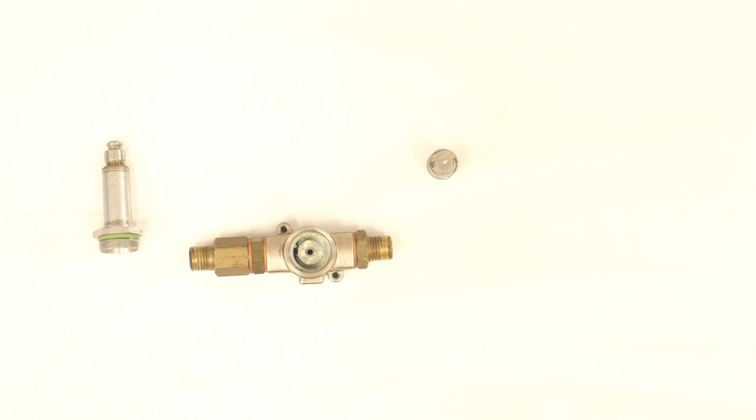Anyway, back to solenoids. All right, before I explain how solenoids work, let me show you the internals of it. So I ended up ripping this one apart already. And for any of you out there who are watching this struggling to get theirs open, let me show you how I ended up separating it. Because what ends up happening, you have your solenoid nucleus recessed in there, and then this guy is screwed on.

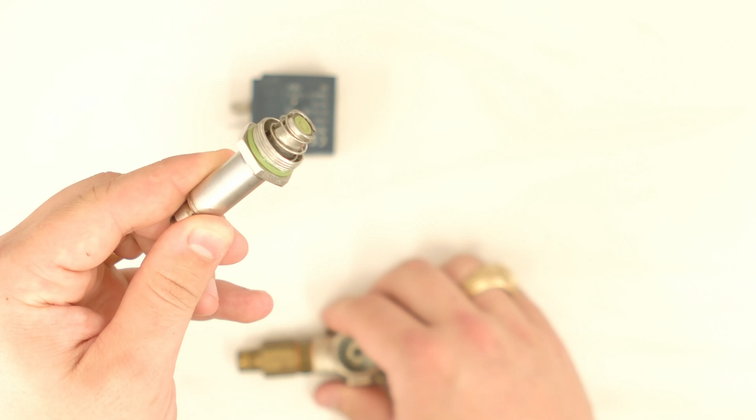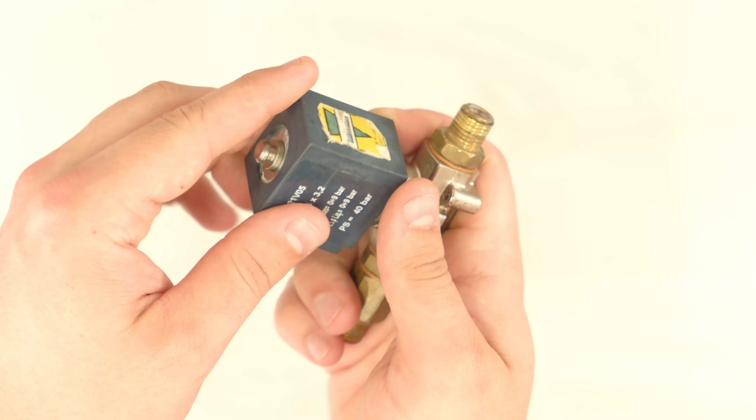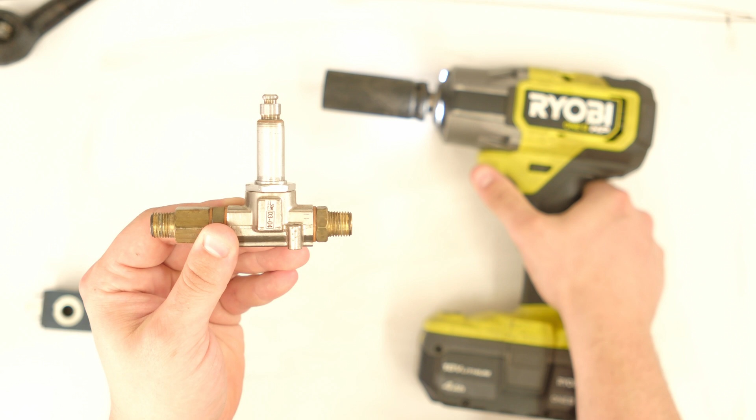This is our electromagnet or solenoid coil, and that seats on top, and then you have some weights on. Getting this guy off, usually pretty easy. You're going to try to get this stupid thing off, and you're going to struggle, and you're going to worry about stripping it. I'm not going to tell you exactly how I do it, but often it involves a vise and this guy. Just being real, you can yell at me in the comment section for that, but guess what? That's pretty efficient if you ask me, especially whenever there's any kind of calcium buildup. Yeah, you can get mad. I don't care. Whatever. Deal with it.

So before I doodle, I just want to show the on-off state. What we're trying to do is make a seal, and you can see that this is an older one that's a little bit dirty. You're trying to make a seal with this nucleus against that little guy there, the little hole right there in the center. You can see where they've been mating up over the years.

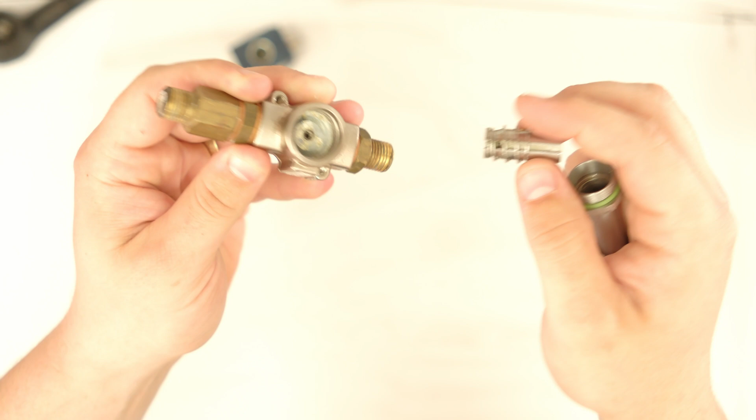And if I can properly press that into the hole, then there's no water flow. And if I lift it out, now there's water flow through it, and we're trying to get water through the channel, into the hole, and out the other side. It's a pretty simple concept. So let me doodle this for you just so you can see it.

We're going to have an off state, which is your normal. So you have no power going to this coil right now. And I'm going to show you how to test these coils in a second. You have an on state. And then to draw the inside here, let's do this. You end up having some kind of little seal in that kind of shape, and then an outlet. This is all your water inlet, and this is your water outlet.

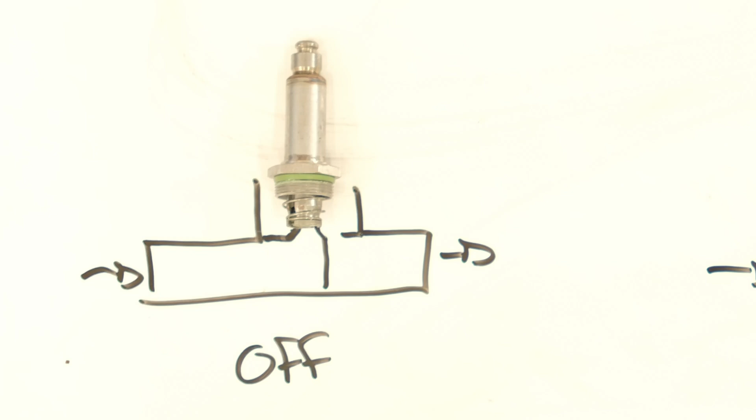For the off state, this spring is now pushing all the way down on that outlet. And hopefully you can see that there. And for the on state, what's happening is we're actually taking this and we're using a magnet to pull that up, and now water can go through the system.

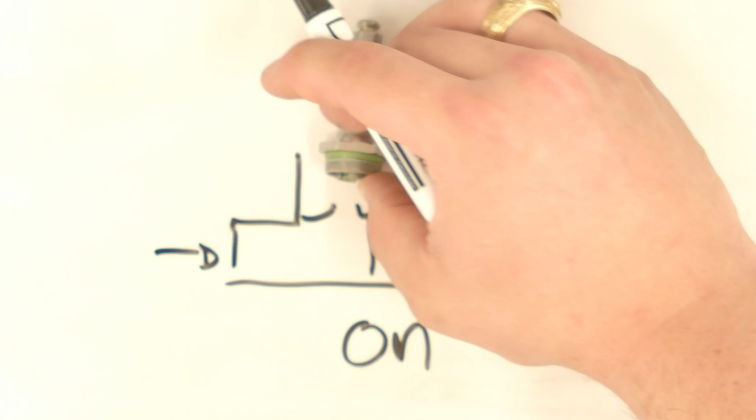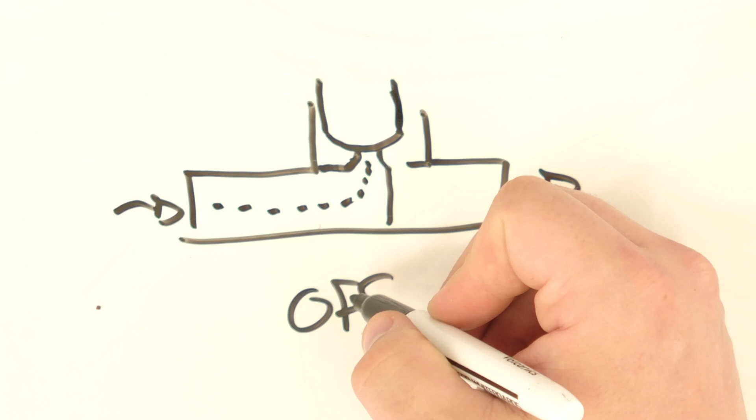So off state, that solenoid coil, the nucleus there, is all the way pressed down. Water's trying to come in, and it ends up hitting, and it can't move anymore. Sometimes you can have it go in the reverse direction. It just depends. For the on state, that magnet has now pulled that solenoid nucleus upwards, so it's now moved up rather than being face down, and you can have water run through, up, over, and through the channel. That's the simple way.

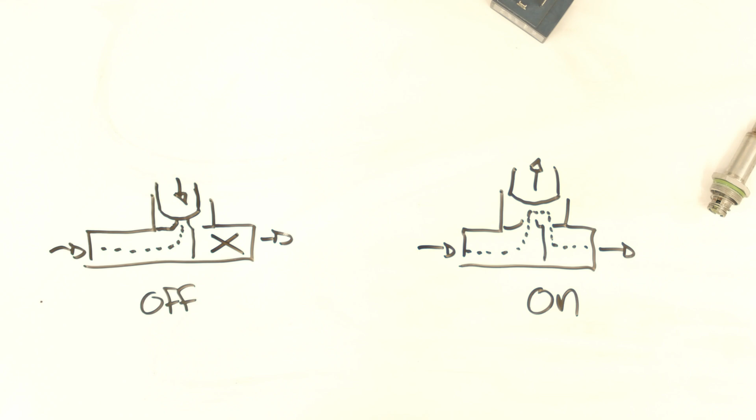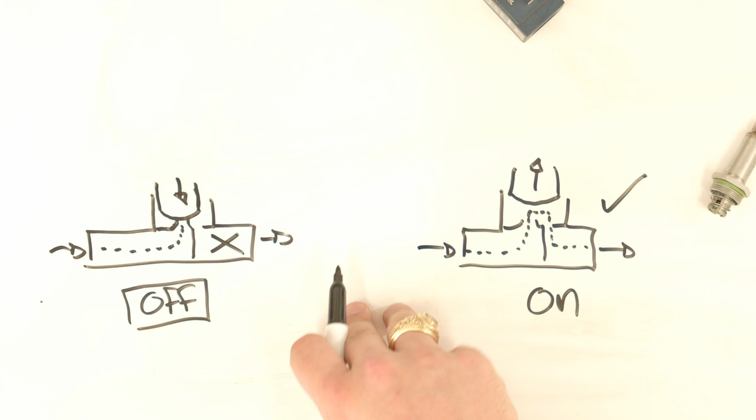On this side, you get no water through, and on this side, you do. So this is our off state. Important to know, and why I love solenoid coils so much, is if it fails and we can't get power to the solenoid, or something happens and your controller breaks, it's not going to sit there and stay on. This only happens if you have a bunch of debris, but normally it fails in the right direction. These things are awesome.

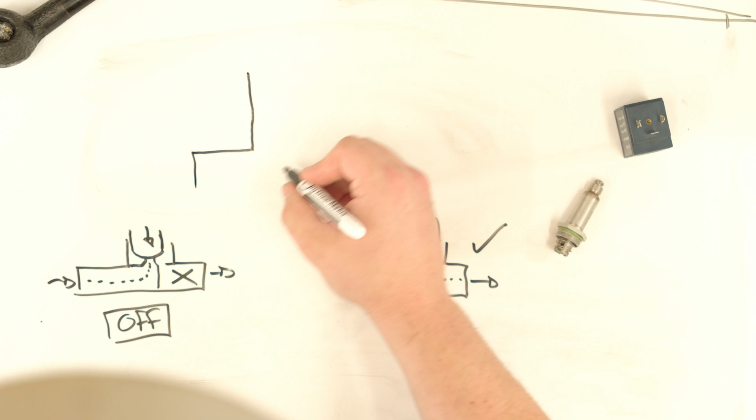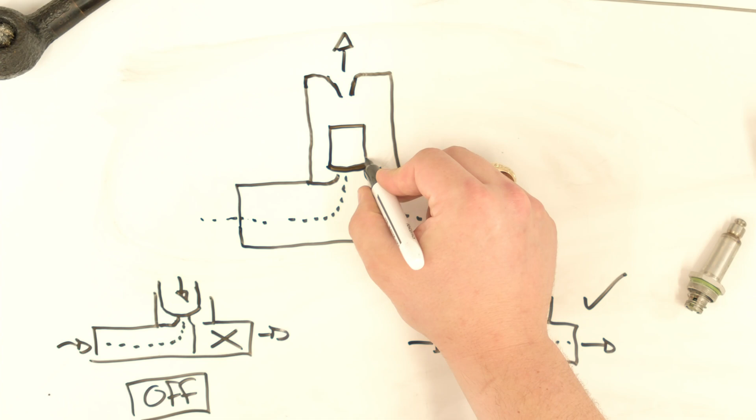Now this configuration is simply for a two-way valve. I'm going to show you a three-way valve now, which is what you normally end up having in your group head. You can see you still have a water channel 1, which is attempting to go through here, but you also have this outlet up here where you could have water going out. The way this works, if I were to have it off, that solenoid coil is now completely blocking down here, but it's not blocking the channel backwards. And this is how you get a backflush.

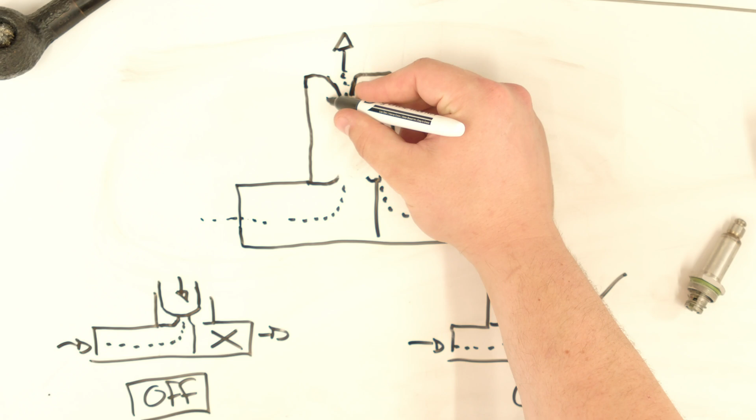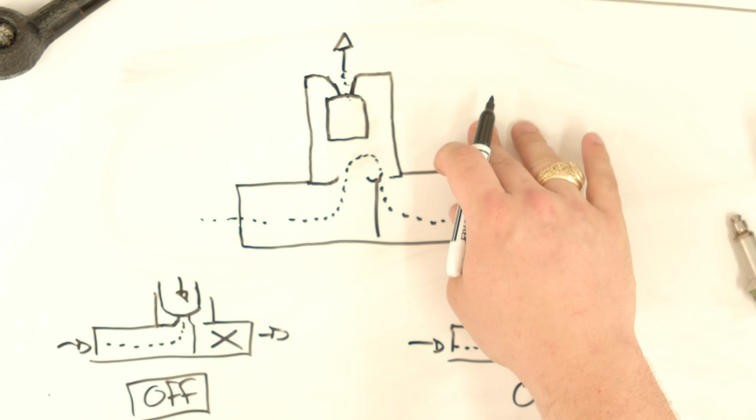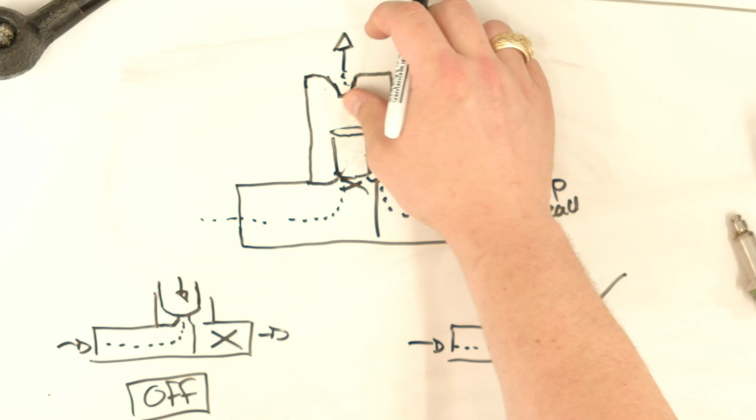So you pressurize the whole system by turning it to the on state, where it now seals up on the top here. So now you can't get any water through there, but you can get water through the normal channel, and this is normally your group head. And now whenever the shot's done, I turn it off. This thing now moves down, it seals up here. Now the water inlet is completely clogged and you can't get anything there. What you can get is all the pressure, because this is now up to 9 bar in that group head. It can now flow backwards out through here, and normally this is your backflush into your drip tray.

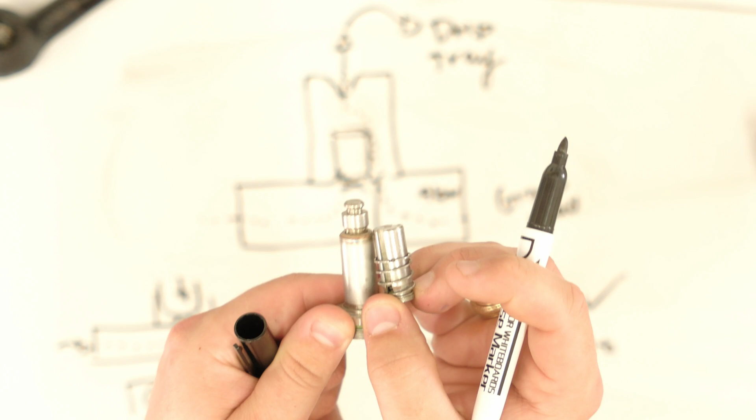But it's a fairly simple design for the 2-way and the 3-way. They both function the exact same. The only difference is instead of up here you have a cap, you would have an outlet valve, and this nucleus would slide all the way up and mate up at the top and completely seal that.

Just a quick pointer for everyone: if you are trying to diagnose if your solenoid is in fact the problem, I want you to listen for this click. You're going to hear a pump hum, but also a click sound. Click, click. Not the button. Listen to the pump going for a minute. Get used to what that sound is, the pump. But then there is a little clicking sound whenever I turn this off that isn't the button. And then a click again when I turn it on that isn't the button.

If you do not hear the click, then your solenoid valve most likely is not functioning properly and it is not actuating that nucleus inside. The sound of that click is actually the nucleus slapping the inside of the nucleus guide. And so if you don't hear a click, you're not getting any movement.

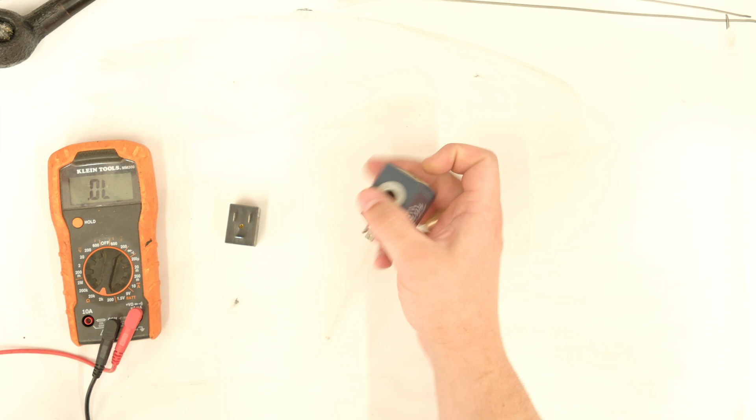All right, let's talk about troubleshooting these things. This is a 120 volt solenoid, and this is actually a 24 volt solenoid. And I know that this one is burnt out. So there are a few ways that these things can break. Point one is actually, this is a good example. If you get a bunch of crap down on that seal there, and it won't actually mate properly, you can end up getting a leak through the solenoid whenever you're not supposed to. So it won't fully shut off.

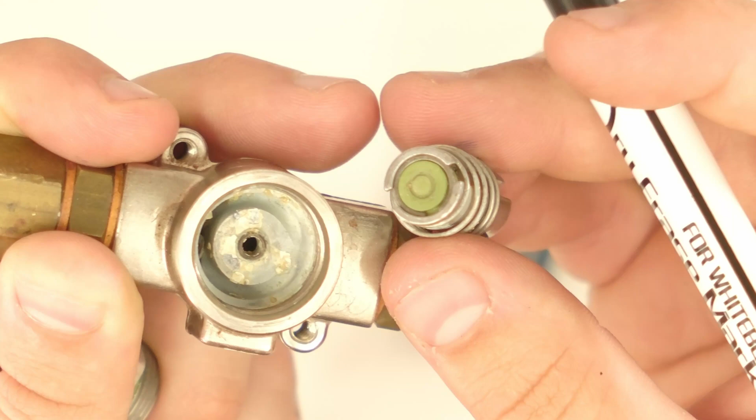In my opinion, that is the worst way one of these fails, because you cannot stop the water flow. If you have a bunch of leaking through a group head or water under your machine, there's a decent chance what has happened is you got a bunch of calcium buildup or scale buildup in there, or even just debris, and now it's trying to go down and mate, but it kind of goes cockeyed and you can still see you have a flow path there. So failure point number one is simply debris, and this is for a bad seal. If you are constantly getting dripping, it is likely debris causing a bad seal.

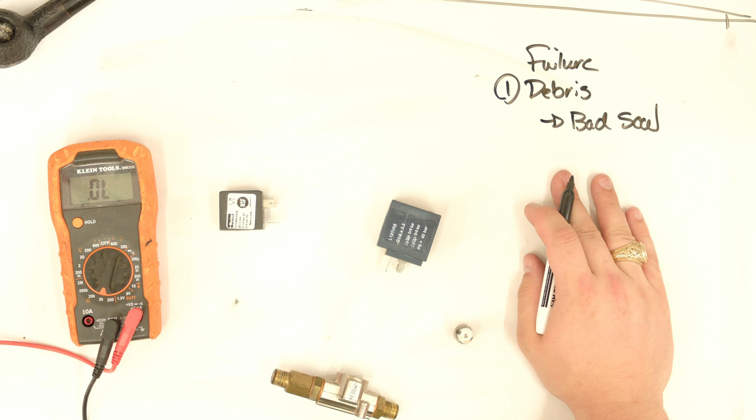Number two is a burnt coil. So like I said, I know that this one's bad. There's two ways that these things tend to fail.

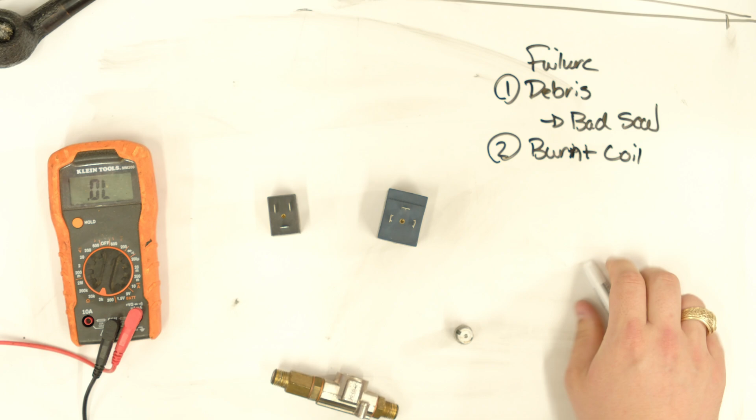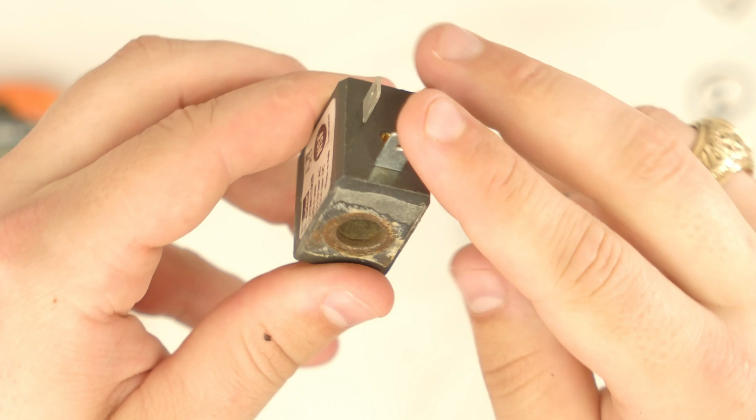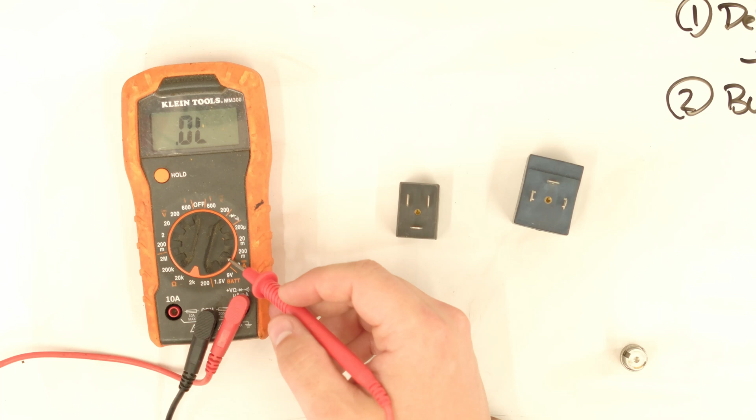For these 3-prongs, sometimes they're 2-prong, but for ones with 3 prongs, what I'm really worried about is the 2 prongs in parallel. I'm not so much worried about this. This is a chassis ground, and you can see how messed up this solenoid coil got. So what we're going to do is I'm going to take a multimeter, and I have it set to 2K resistance, and I want to make sure that I have some readable resistance across these 2 coils.

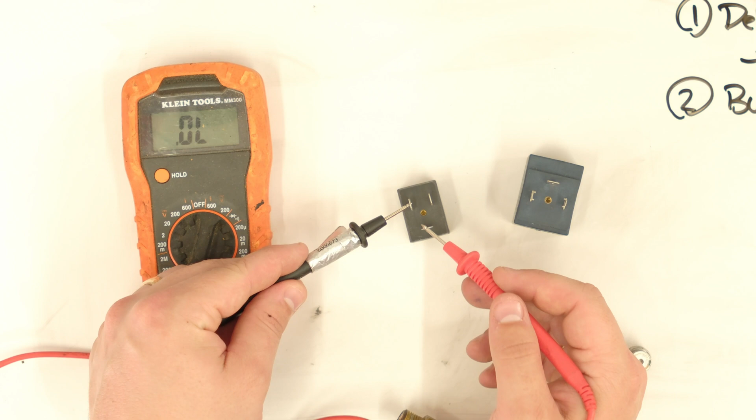And you can see that I'm not getting anything across these 2. Again, I'm not really worried about this bottom one. Yet, on this one, look at this. I am getting a reading of 221 ohms, which is what I expect across this coil. So this one for sure is completely burnt up.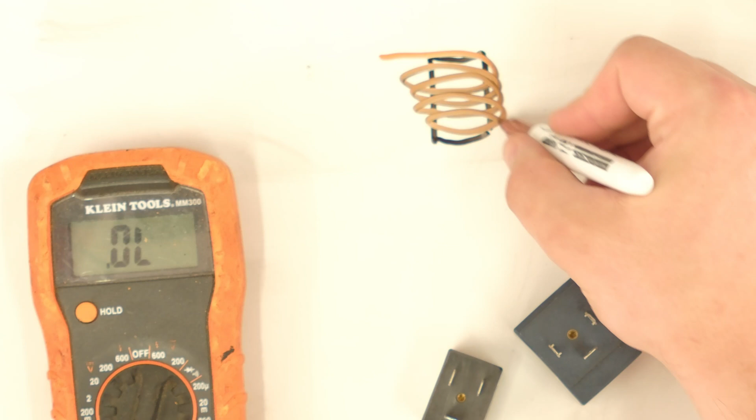And so what happens is inside these guys, you essentially have a tube, which is a ferrous material like iron or steel. You have a wire running all the way around this tube and out. And these are your 2 pins. So this is your positive and your negative terminal, not your ground. Your ground is the other one. And if I were to go in here and break those wires, now I have an overload, which is what I was reading on this multimeter, and we're not getting any current through, therefore no magnet.

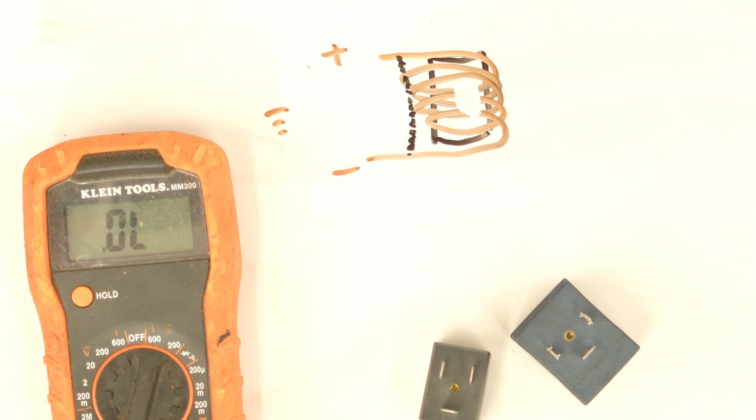The other thing that can happen is a little bit less frequent, but it does happen where some of the insulation on these wires will go bad, and now you essentially end up getting a connection across the 2 terminals that you're not supposed to. If you read and you get 0 ohms, not overloaded, you actually have a short. And so that, again, I'm calling it a burnt coil just because it's easier for customers to understand. But a burnt coil means that you're either getting overload or a short, and this thing is bad.

Unfortunately, you can't really open these up. The only thing you can do is simply replace it. So, simple enough, I hope. Failure point number 3 and 4 both have to do with the nucleus. The first one is your seal. Like I said, this is a very old machine, because you can see there's actually damage on that nucleus seal.

I do not like these ones that use rubber gaskets. You're going to see a lot of people talk about, I believe it's ruby nucleuses. And in that, instead of rubber, you have a flat mating surface that's going to go down and hit, and this will also have a spring force. But if you take it apart and you realize that this is cracked, damaged, or otherwise not good, and you're getting dripping through the system whenever you're not supposed to, your nucleus is bad.

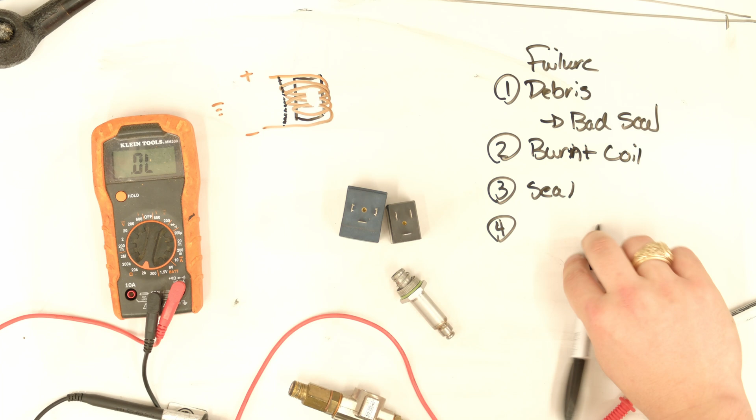And then the last thing, and this happens if you don't have good water, you're going to take this thing apart, and this thing is going to be stiff. You cannot move it. Normally, it should slide very freely like that, and it'll either be stuck open or stuck closed. That is usually a scale buildup. You really need to get your water checked out. But those are really the 4 points. So this last one we're going to call a jam.

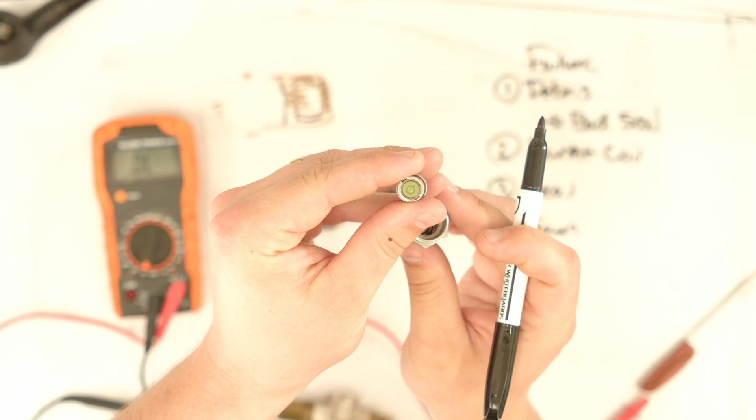So first one, you can have debris making the seal with the gateway there bad. The second one is your solenoid coil is bad, and you can usually check that just by going across the two terminals. The third is that the nucleus itself is damaged and it's no longer good. Or the fourth is that this thing is not moving freely.

Now, honorable mention 5. You go through and you check all of these, and none of them are the problem. Usually it's upstream. And in this case, you need to check your wiring. This is a lot more dangerous. I typically recommend you leave this to professionals once you get to this point.

You're usually going to have to turn your machine on, actuate whatever button would normally turn this solenoid coil on, and then using your multimeter on a voltage setting, you're going to see if you're actually getting voltage across that terminal where you're supposed to be. So making sure you're actually getting power to these terminals.

And you're probably going to find it's either low power or no power, which is a nightmare to chase, and that is what it is. Now, I hope that you're looking at this and you're thinking to yourself, man, that actually isn't that complicated. And guess what? It's not. These are not complicated devices at all.

Again, with your three-way, you get a little more complicated because if this is your inlet, on a two-way, it's just trying to make a channel and a flow path through. And on a three-way, whenever it turns off, you now have a backwards flow path out. But it's simple. Basically, I turn on a magnet.

Wrong way. I turn on the magnet. It lifts the nucleus up. You get water through the system. Whenever I turn off the magnet, the nucleus ends up falling back down and sealing the system. It's really simple. A lot of times, these are actually extremely reliable devices.

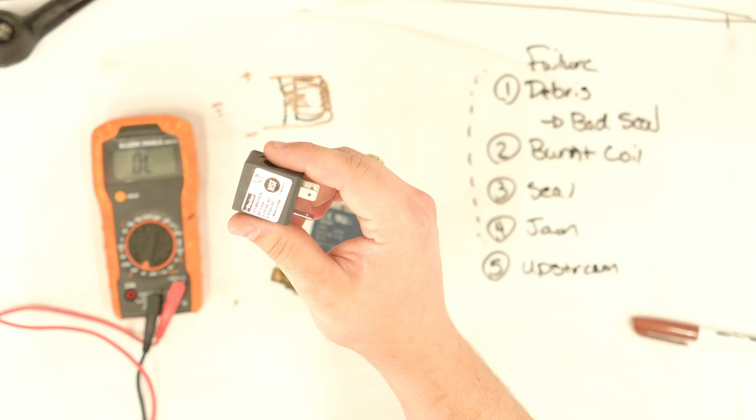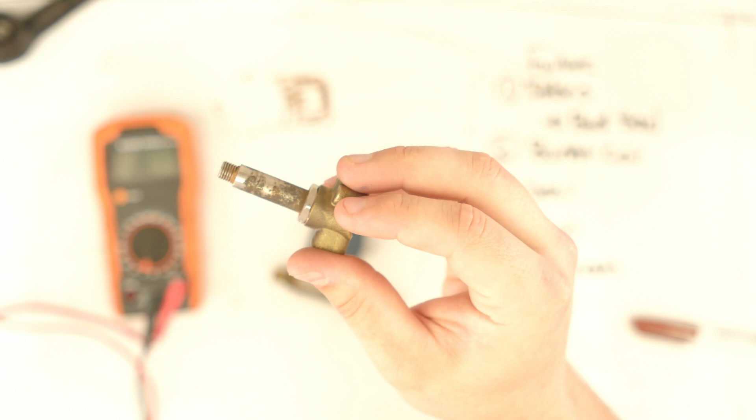This one burnt up, which was a really weird error that I hardly ever see. You can see this guide here is also all rusted up. This had actually developed a pinhole leak here towards the base, and was spewing water all over the actual solenoid controller like this. And so it fried the inside along with having a pinhole leak. So I ended up replacing this whole thing.

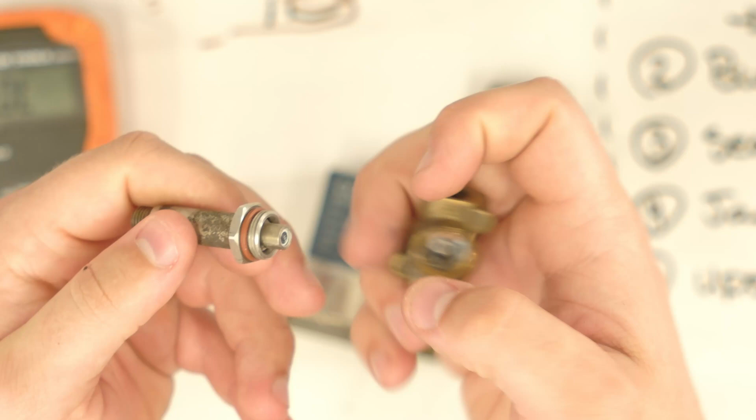A lot of times though, you can take it apart, and this one's a little bit of a different design. Your spring is here on the top rather than at the bottom. You can see how bad this one got. And it also had a rubber seal that I didn't like.

But a lot of times, what ends up going bad isn't your coil, but something on the inside, where you either get a bunch of bad debris here on the inlet and the outlet, and this one isn't terrible, you end up getting a failed nucleus seal, or you get a jam. If you take these things apart and put it in a citric acid bath like this one, that will end up cleaning all of it up for you.

This is just your normal descaling solution, and I don't know how quick this is going to work. It's a pretty simple way to clean these guys. So a little citric acid bath just for a few minutes. You can see how much that cleaned up. Again, not hard to service. This one was also really bad, and the same bath did this.

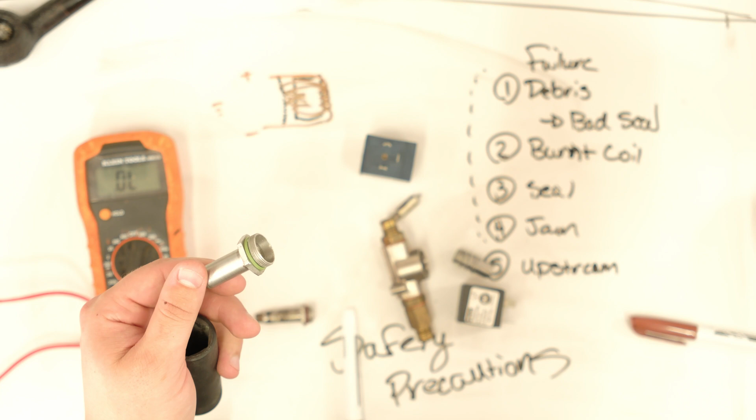My one recommendation, though, is get a multi-pack of O-rings, specifically the Viton, whatever. And whenever you open one of these up, go ahead and replace the O-ring outside seal. It's good practice. It's going to save you from leaks, because you can get leaks from around the outside of this, and that's a good way to fry a lot of your electronics. So replace the O-rings while you're in there.

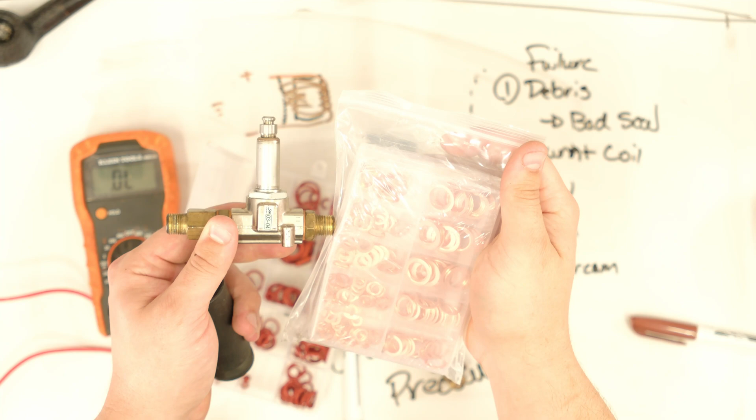If you're messing with a crush washer like that, get a multi-pack of crush washers, they're not expensive. Don't be silly. Go ahead and do the things right. This and this combined were like $20, and they'll last me for years. But the only expensive part is this guy. If this breaks, you're kind of out of luck.

With a lot of the nucleus, you can replace those. A lot of major manufacturers like La Marzocco have these readily available, including the nucleus itself. Nicer nuclei can be replaced or rebuilt. The ones with these rubber seals, though, I always say just replace it if it goes bad. It's not worth the hassle of trying to put in a new seal.

But again, they're so simple. I don't know why we have this mysticism around, oh, there's a box with a wire, I can't work on that. Yes, you stinking can. If you can get it off the machine, use some brake line wrenches to get these off, or even Knipex for all that matters, you can get this thing done.

I cheat. This has saved so much trouble over the years. So I personally use an impact driver like that. You don't have to. If you're going to get an impact driver or really ever try to get these off, I do recommend longer sockets like this that can actually reach all the way down over.

Otherwise, you're going to have a hard time, and you probably will strip this off because these are not very big. The width there is not very big. Usually you want as much grip as you can get. You're going to sit there and torque it, and you're going to move it, and it's just going to be frustrating for you. If you can, get it off of the machine first. That is my biggest tip.

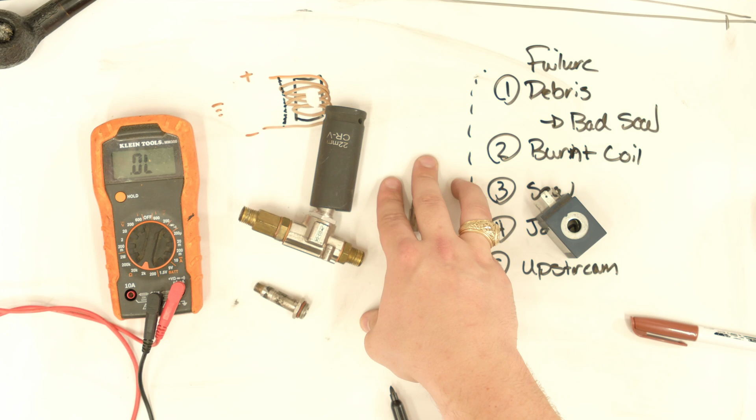I see people opening up machines without taking safety precautions, having no idea what they're playing with. Turn the machine off, and not just turn it off, unplug the stinking thing because it still has power to it, or at least flip a breaker, and then start the process.

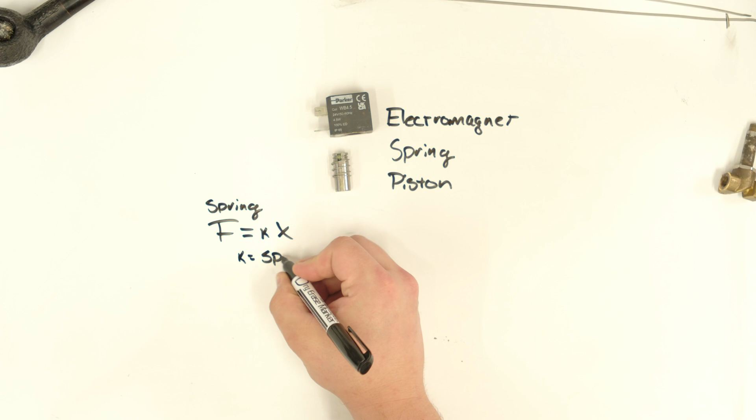But solenoid valves, super simple. Check for the failure point. Get a multimeter if you don't have it. If you are an at-home espresso enthusiast and you want to be working on these things, again, the way all this works is simple. It's simple math. Now, I'm going to do some math. A force. This is for springs specifically. F equals Kx, where K is your spring constant and x is your travel distance.

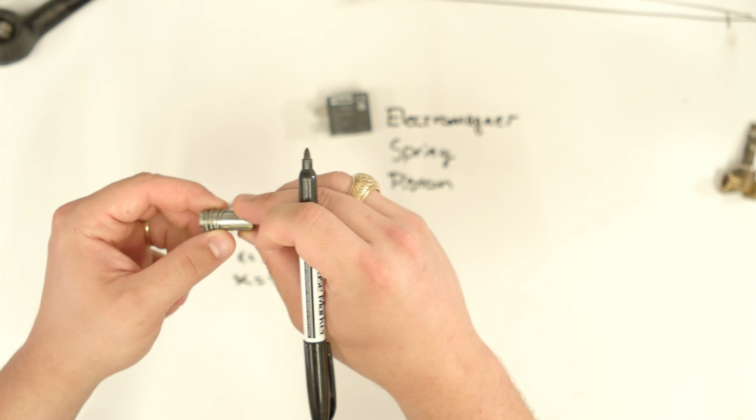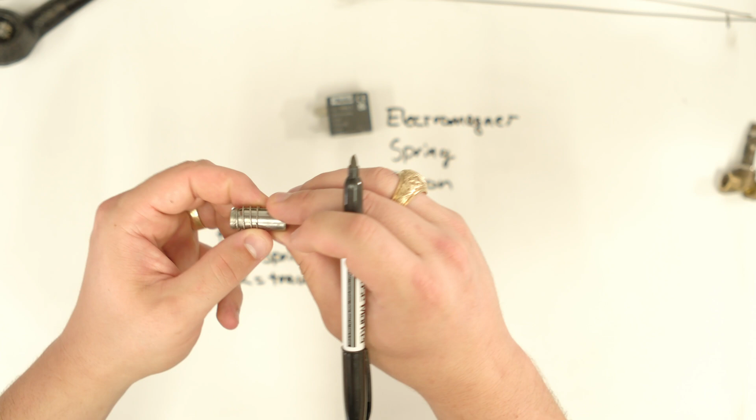The reason I'm getting into this is I didn't understand for the longest time how in the world does this stinking little spring prevent 9 bars of pressure going through the system? Lots and lots of pressure, like 120 psi, versus a little spring. Which one wins? Well, this is how it works. What you end up getting is this little plunger here making a seal. You can see this is an old one, and that little ring on the inside is where it's making a seal at about the size of 1 millimeter.

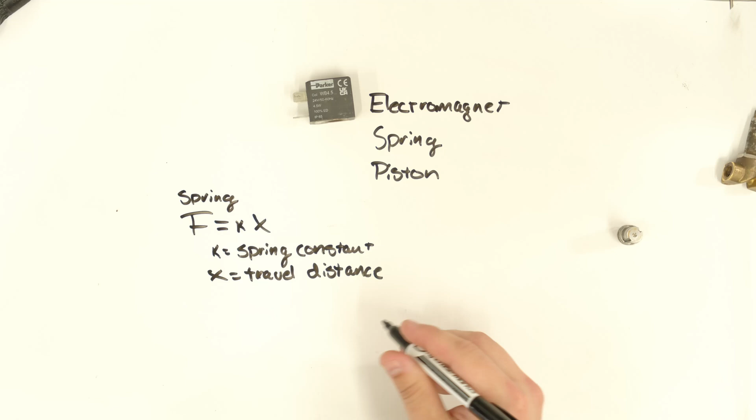And the pressure of water, or the force being applied to this, we're going to call this water force. Force, F, equals your pressure times your area. For anything in a circle, your area equals pi r squared, remember this, and your pressure equals whatever the inlet is. Normally for a water supply, you're looking at something like 3 bar, which is 300,000 newtons. And we know that the radius here is normally only about half a millimeter.

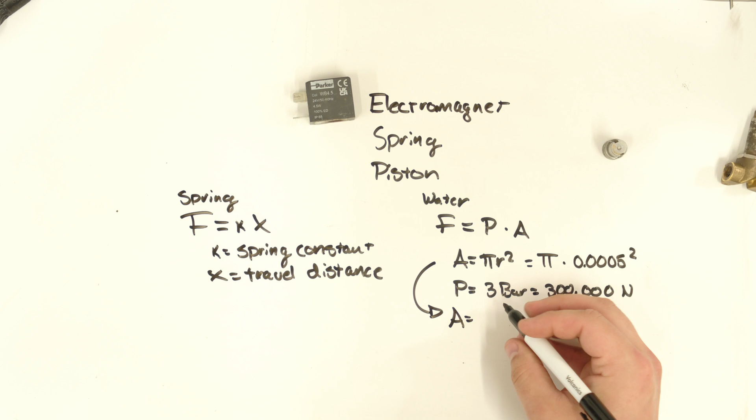We end up getting pi times 0.0005 squared. So our area is equal to 7.854 times 10 to the negative 7 meters squared. We have 300,000 newtons. So plugging our A and our P back into this equation here, force equals 300K times 7.854 times 10 to the negative 7th, which ends up getting us a total force of 0.263 newtons,

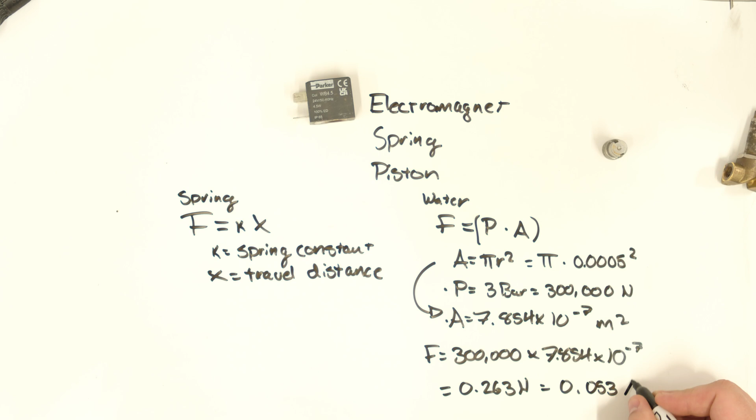which equals 0.053 pounds force, or roughly 24 grams of force being applied to this guy whenever there is water pressure going in. Going back over to our spring constant, I don't really care. All I know is F equals K times x needs to be greater than 24 grams to get a good seal. 24 grams, as we all know in the coffee world, is not that much.

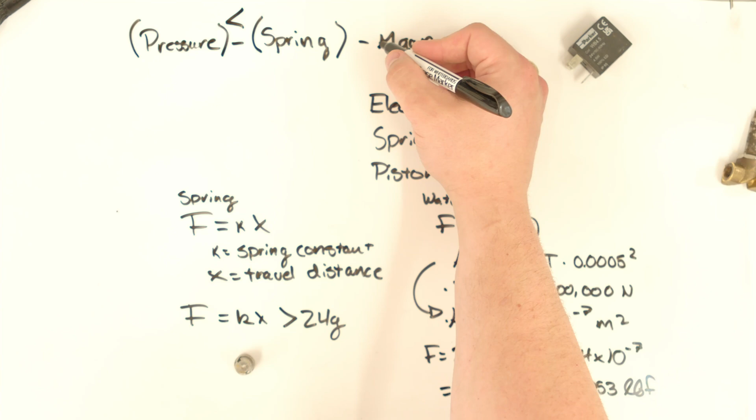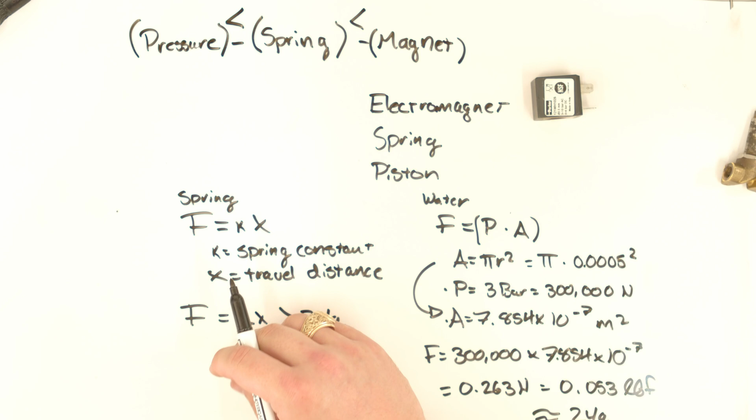So bringing this back in theory, we have 3 constraints. We have the pressure, we have the spring, and we have the magnet. To have a closed system, I need this pressure to be less than this spring, but to have an open system, I need this spring to be less than the magnet. So essentially, if we can apply more than 24 grams of magnet force to the solenoid nucleus, then we can open up the system. I hope that's enough nerding out for you. That's why it works out.

Anyway, back to the drawing board. It's just an electromagnet like you might have seen at a second grade science fair. Stop making it overcomplicated and take care of them. Make sure you service them. Don't just let them sit there and rot.

That's all. Thank you very much. I hope that this is helpful. These things are awesome, and they're the reason why your espresso machine actually works. Without it, you have water all over the floor.